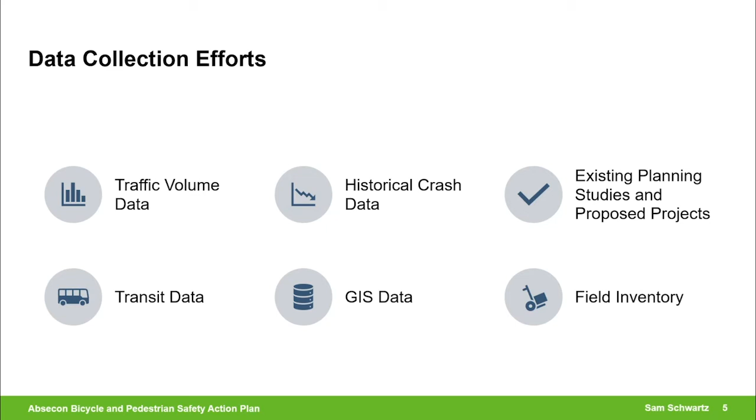An extensive data collection effort allows us to paint a picture of the existing transportation conditions of Absecon, with special focus on pedestrian and bicycle transportation. The project team has collected traffic volume data, historical crash data, transit data, mapping data, researched previous planning studies and proposed projects, and completed a field inventory of 8 selected streets for focus, known in this project as priority corridors.

A field inventory was conducted for the 8 priority corridors. These corridors were identified by the city and confirmed by the project's steering committee. Along each of these corridors, measurements were taken and roadway and sidewalk conditions were noted. The selected priority corridors include the following: New Jersey Avenue, Station Avenue, Ohio Avenue, Shore Road, Faunce Landing Road, Pitney Road, Mill Road, and Morton Avenue, which becomes 10th Avenue north of Crestview.

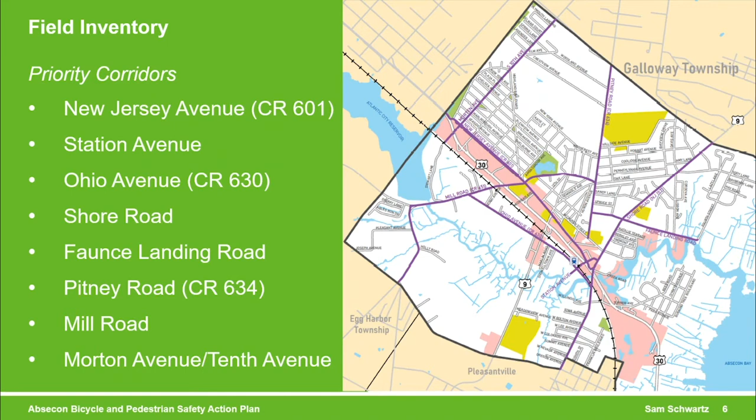LTS 2 indicates that the road could be comfortably ridden by the general adult population. While traffic volumes are higher here than LTS 1 roads, traffic volumes are still minimal and speeds are still relatively slow. LTS 3 is considered comfortable for bicyclists who are more confident, as these roadways tend to have both higher speeds and higher traffic volumes than LTS 1 and 2. Finally, LTS 4 is a level that may be uncomfortable for most bicyclists, but acceptable for experienced bicyclists.

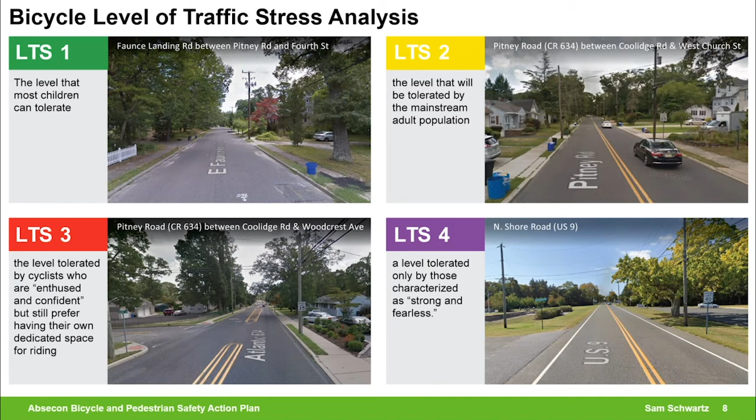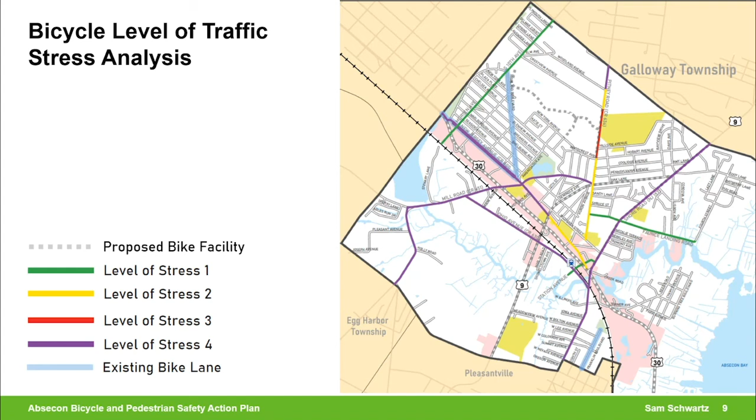As shown on this map, there are a variety of stress levels found along the priority corridors. You'll see that some roadways, such as Pitney, changed LTS throughout the roadway. This could be due to roadway width changes or changes in the speed limit, which are both factors that determine the LTS level.

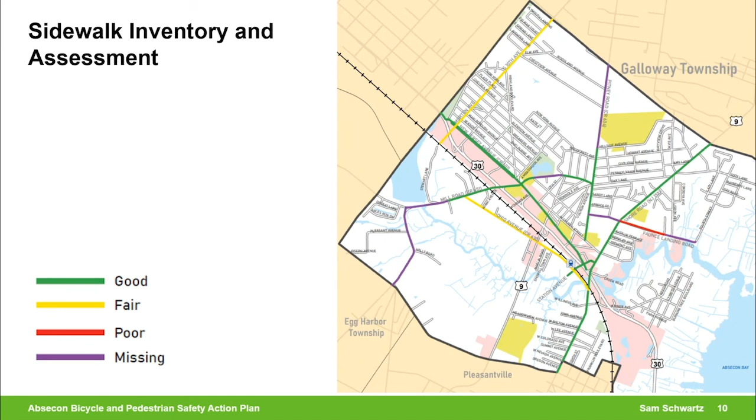An objective of this report is to identify gaps in the pedestrian network. As you can see on the map, there are segments of missing sidewalk in various locations along the priority corridors. You'll see that there is no sidewalk along Pitney Road on the north side of Absecon. We understand that the city has plans to extend sidewalk near Marsh Elementary School and Attales Middle School, and will consider this when identifying proposed sidewalk connections.

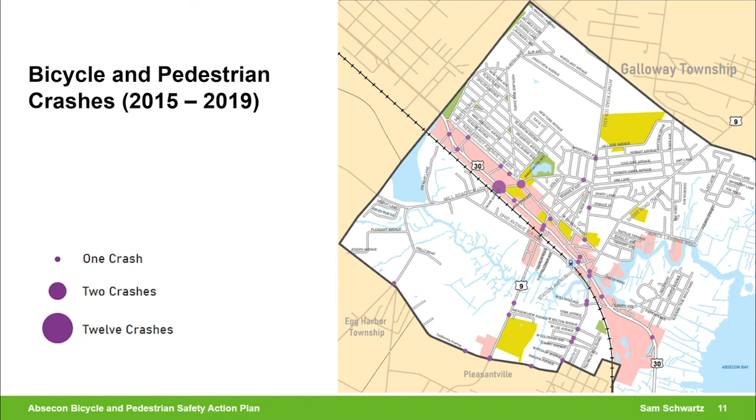The New Jersey Department of Transportation is currently working on this intersection to improve safety, so we'll focus less here and instead examine other US 30 locations for safety improvements where crashes were common. These crash maps show the crash data we've collected.

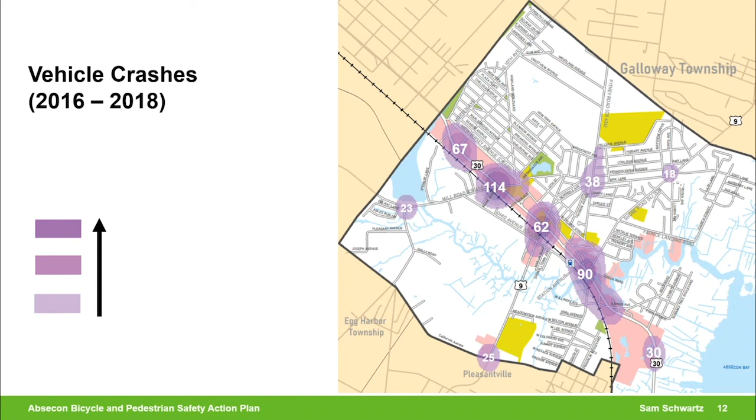But looking ahead, what and where are some unsafe conditions that we can address before they become a problem? We encourage you to identify locations around Absecon where you think there are potential crash issues, or perhaps where you've seen near-miss incidents.

After a thorough review of the analysis conducted and obtaining public input, recommendations will be made for each of the priority corridors. Some recommendations could include treatments such as Federal Highway Administration proven safety countermeasures, tactical urbanism treatments, bicycle facilities, connections to transit, traffic calming measures, and pedestrian safety treatments.

The Federal Highway Administration has selected safety countermeasures based on proven effectiveness and benefits to encourage widespread implementation by state, tribal, and local transportation agencies to reduce serious injuries and fatalities on roadways. When possible, we will include some of these recommendations and countermeasures in the plan.

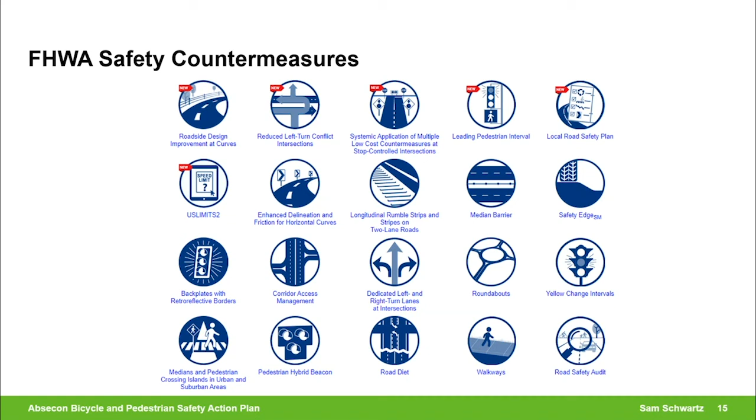Also known as do-it-yourself urbanism, tactical urbanism refers to a city, organizational, and/or citizen-led approach to neighborhood community building, using short-term, low-cost, and scalable interventions to catalyze long-term change. This technique can serve as a demonstration of proposed improvements, allowing the community to experience the benefits firsthand. Due to the pandemic, you may have already seen an increase of tactical urbanism in many towns.

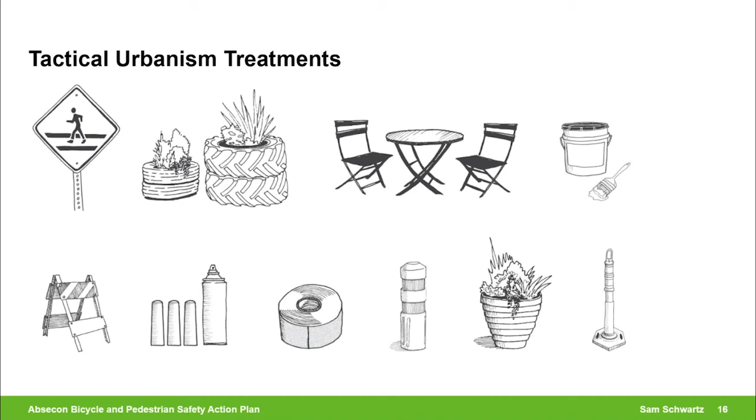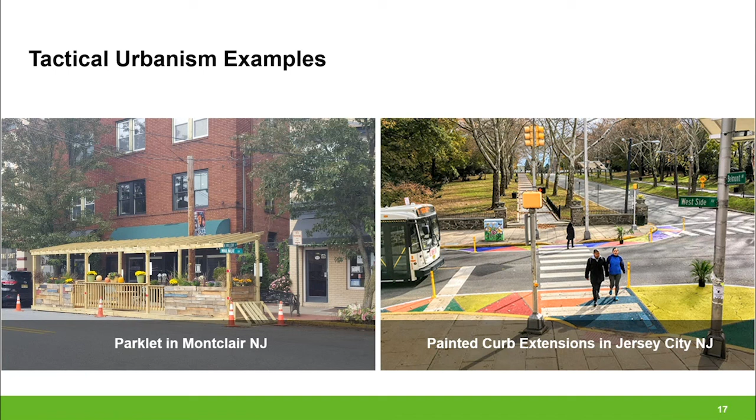On the right are examples of painted curb extensions in Jersey City. The painted design can provide a sense of community and uniqueness to a neighborhood.

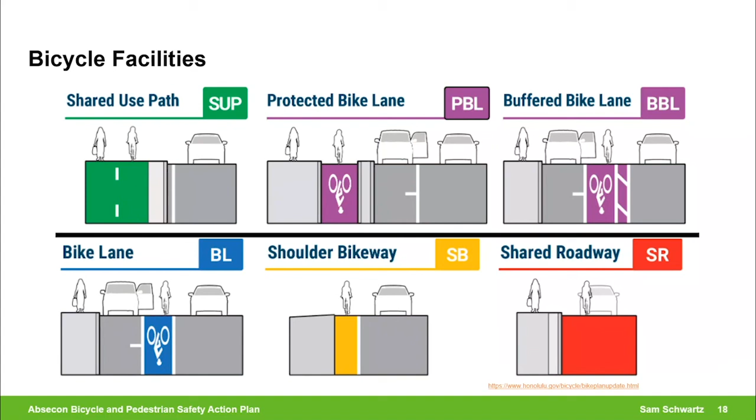There are a wide variety of bicycle facility types, each more or less appropriate depending on the roadway conditions and the bicycle LTS from the existing conditions analysis. In order from left to right, these options should be utilized from highest to lowest traffic volumes. Therefore, a shared use path may be most appropriate adjacent to a road with LTS 4, while a shared roadway may be most appropriate for a road with LTS 1.

Some recommendations specific to pedestrians that may be seen in the Safety Action Plan include pedestrian crossing islands, sidewalk improvements, and pedestrian hybrid or rapid rectangular flashing beacons. You may be familiar with the rapid rectangular flashing beacon that currently exists at the Pitney Road entrance to the elementary and middle schools.

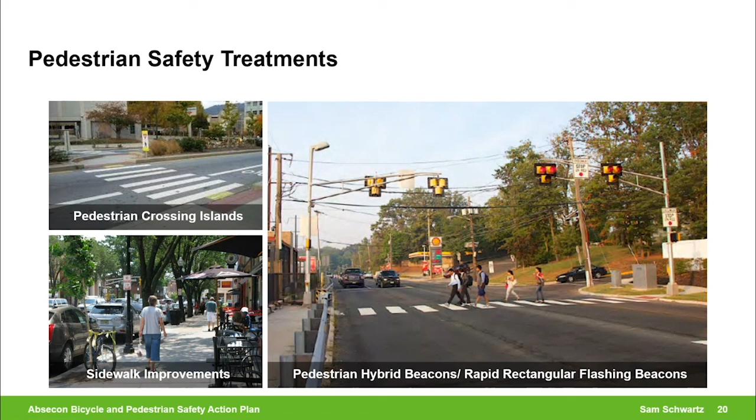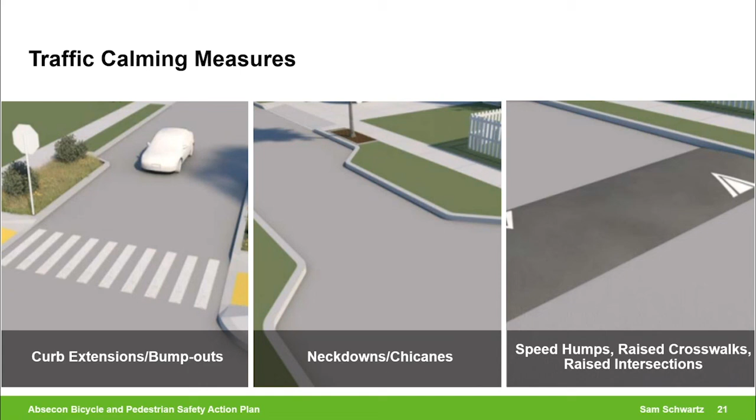Traffic calming measures include curb extensions, also known as bump outs, neck downs, chicanes, speed humps, raised crosswalks, and raised intersections. The intent of these measures is to encourage drivers to slow down.

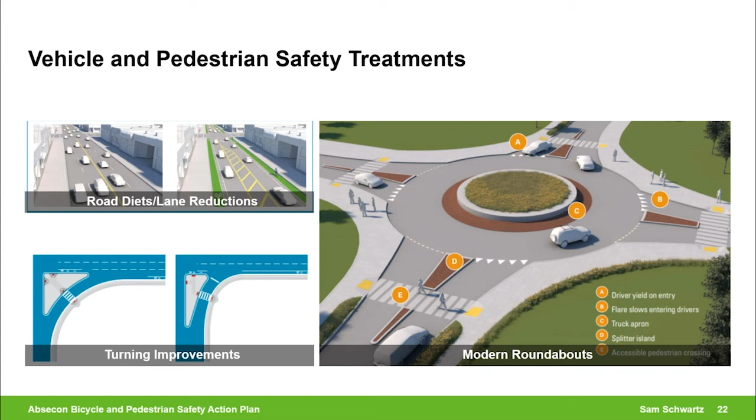Lastly, some larger improvements that may be recommended include road diets, also known as lane reductions, turning movement improvements, and modern roundabouts. To learn more about these treatments and how they increase pedestrian and bicycle safety, resources with links are available on the project website.

Now that you've learned about the project and what we've done so far, as well as some potential recommendations, it's your turn. We need feedback from you, as you are the experts of your community. Tell us about what you would like to see.

You already know there is a project website since you found this video. The website is your place to provide valuable feedback in multiple ways. First, the website contains a link to a survey to share your experiences walking and bicycling around Absecon.

Second, we have provided a fun interactive mapping tool for you to map your experiences as well. You can use the map to identify any barriers or obstacles to walking, or perhaps tell us about a desired walking route.

In addition to this video, we have provided a separate video that offers an overview and tutorial of the mapping tool. Additionally, the website contains a comment form and a live chat if you'd like to discuss your questions and/or comments directly with our project team.

Now that you've watched this informational video, we encourage you to fill out the survey and use the mapping tool on the website. Once we've received your feedback, we will begin to develop recommendations.

After these recommendations have been made, we will present them back to you, either through another series of informational videos like this one, in person at an event depending on social distancing policies, or through a live streaming presentation.